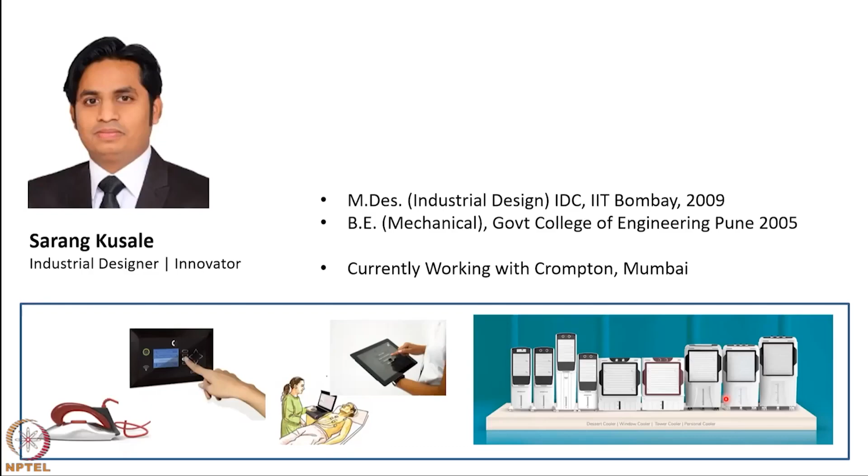So currently I'm working with Crompton, and this is a range of air coolers which I have recently designed and launched in the market last year. So I'm only showing those projects which are actually in market and available in public domain. So apart from this, this is my Instagram page.

So I also pursue a hobby of papercraft and origami, and most of these recent projects are done with Mumbai Airport, where every year they conduct a festival, Jaya He Museum. So these are some of the animals which are created for the Jaya He Museum festival. If you see, these are actually the state animals of our seven sisters, which are the northeast states. So some of the glimpses of this papercraft.

Then regarding innovation, like what is innovation actually? It's very fuzzy. Anyone want to answer? Like quick answer, we can have an interactive session. A creative way to solve a problem. Okay. Anyone want to add to that? Something which is new, not yet present in the market. Absolutely, definitely. Modification, advanced version of something that is already existing. Okay.

So what is that advanced version? What is existing? So, like bulb to tube light, for example. Mm-hmm. Bulb to LED bulb. Bulb was an invention, and the next thing that goes beyond that, it makes it usable and very much accessible. That makes it an innovation.

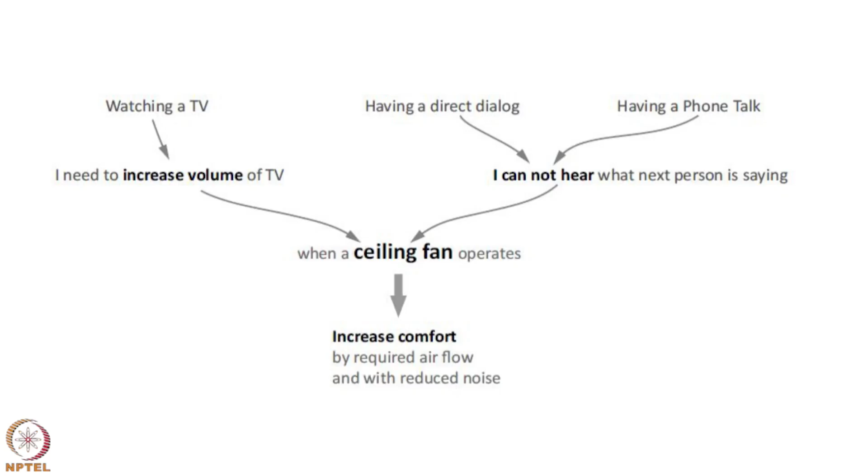So basically, earlier when we were doing fan projects, this is the insight which we picked: whenever we are watching TV, we need to increase the TV volume when we don't hear the other person. Or when I'm having a dialogue with someone, I can't hear what the other person is saying. When I was having a phone talk, why is that happening? When the ceiling fan rotates at very high speed, it also generates some noise. So that is causing the discomfort. So this was the insight which was picked up. It looks very simplified here, but it takes a lot of time to arrive at this. So a lot of actual user research was there.

And then, going ahead with this insight in mind, I was having a ferry ride. And then I encountered the seagull bird. I was photographing it. That really took my attention, because that bird, when you see, doesn't flap its wings often. There is a very interesting thing about the seagull. It's the only bird which you spot inside the ocean, because they use the wind current and they don't flap their wings very often. That's why they can conserve their energy and they can glide for hours and hours over the oceans.

So after I came back to my desk, I searched through technical papers. I actually got hold of some actual wing profiles and then took it ahead. So this is how the project started. This start was not like a normal project, which starts with a marketing brief; this is the kind of hobby project which we do.

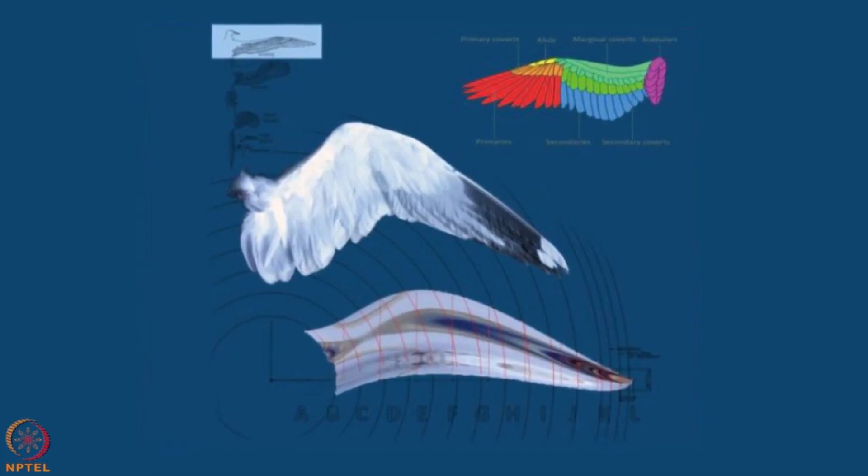Once those projects reach a certain level, the proof of concept level, we showcase them to marketing. So then we discussed the seagull bird and did a technical study of the wing profiles. Then I did a lot of iterations with the digital model, actual paper models, and actual 3D printed models. So a lot of refinement was done. Every revision is an upgraded version of the earlier one.

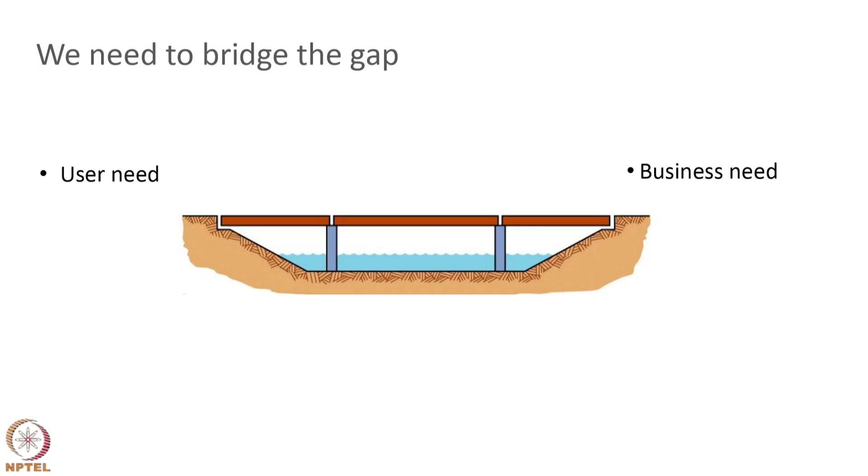And while doing a concept around this seagull bird profile, when we are making a commercial project, we need to bridge this gap. We are the best people who can bridge this gap between the business need and the user need. We are well versed in the user need, what is faced by the user, and the ideas we get, but that has to be commercialized into a successful product. So we have to study the other side also. I think Chakravarthy sir might have covered this in his innovation lecture, the business side of design.

This is the initial concept where it started. At that time, this was the current product portfolio of Crompton. How the product will stand in this portfolio, how the price segment should be for this product. If you see, there were some decorative fans which had lesser performance. But this fan will offer premiumness as well as better technical performance. So this segment was not there earlier. And noise as a comfort parameter was not considered, because people were only worried about having a high speed fan which gives higher delivery.

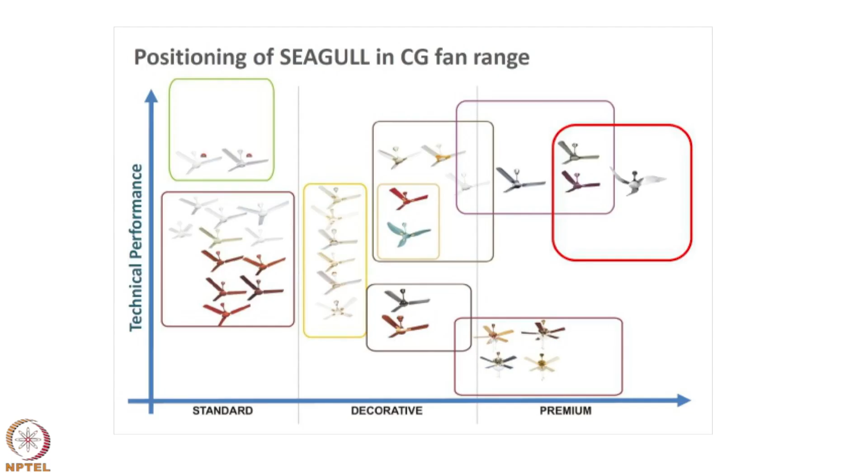So I had to struggle a lot here with the marketing or business team, that okay, having a certain amount of airflow on your skin is required, but that doesn't necessarily mean you should have that high RPM. So that's an interesting way. And there are also paradigms in people's minds, because whenever you want to change something which is not part of the existing scenario, people find it very difficult to digest. So that's why we did the basic concept of this.

These are concept renders, and we did an actual prototype of the fan at 1:1 scale. We have also done this kind of detailing, so the 1:1 scale will give them the exact idea of how the fan will look. And there was also a question: will this fan provide the sufficient air which is needed? So for that we made a 1:1 actual prototype mounted with a motor, rotated it, and that air feeling was delivered to the business people, so they could take better decisions. And that's where the power of prototyping lies.

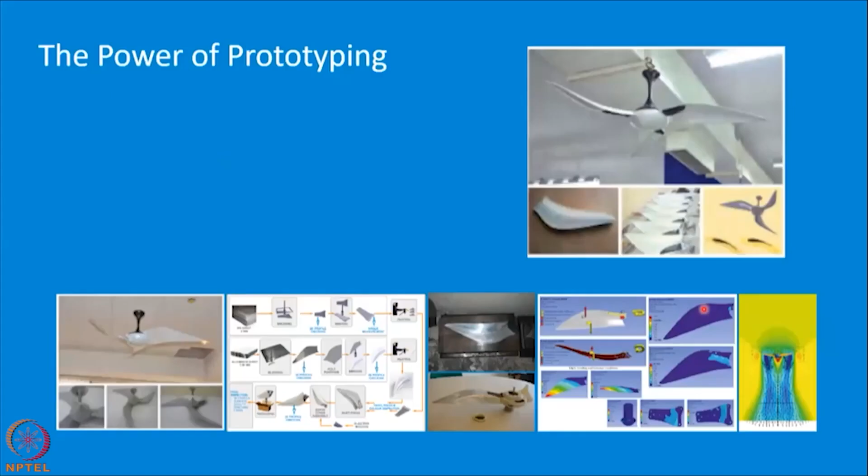Even whenever you're working with Chakku sir, he will always insist on having prototypes, mock-up models, and he will not be satisfied with one mock-up model. Building more prototypes helps, but when you are demonstrating a concept which is out of the box, the prototype is a very powerful tool, which can provide the product experience for the target audience and the business people as well. So we did this actual prototype.

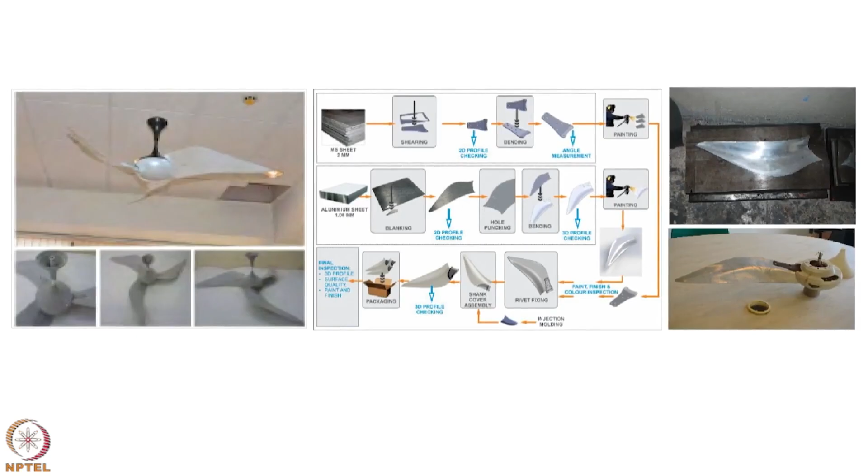We made a raw tool of this blade, and then we actually did simulation also. What you see is the simulations to understand the airflow, whether it will deliver the same amount of air, and this way we were successful in providing the amount of air but at very low speed. The existing fan runs at 400 plus rpm; this fan will run at only 280 rpm. And this gives a very considerable saving in decibels, that is, the noise levels. So this is the blade profile which we developed, and later on we filed a patent on this also.

So this blade has this profile which is continuously varying from hub to tip and from the leading edge to trailing edge. So it's a continuously varying profile. A patent is also granted on this blade profile. So the form, if you consider here, is very functional, and that functionality of this form helped us to get this patent.

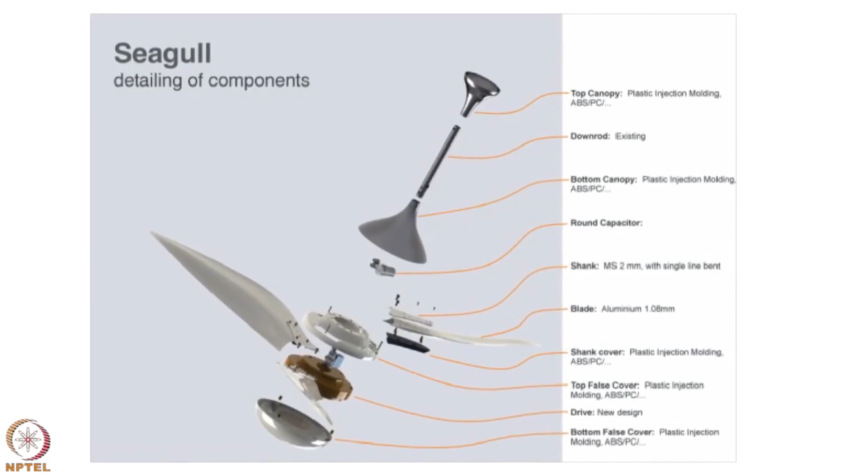Then we further commercialized it with the range of possible trends which are available, and we have mapped this fan in different themes. And this is a concept for the ceiling fan with actual proposed colors. So we took the same color scheme of the seagull, which is gray and white, which is merging in modern interiors. And so finally the experience of the comfort.

So though this fan is giving a high air delivery, it is operating at very low speed. And that's the key for the silent operation of this fan. And later on we also found out that this fan's air has a texture. So when we are designing a product, we are only thinking about the product design, but when the user experiences the product, he does not see only the product, but the actual experience, that is how the air is thrown to the user, what comfort the air texture is providing to the user, that also matters.

So this is a side profile of this fan. So any question on this? I kept it very simple because there are a lot of details which I can't show. We want to see all the details. It's very nicely captured, Sarang. But we will open it to the students.

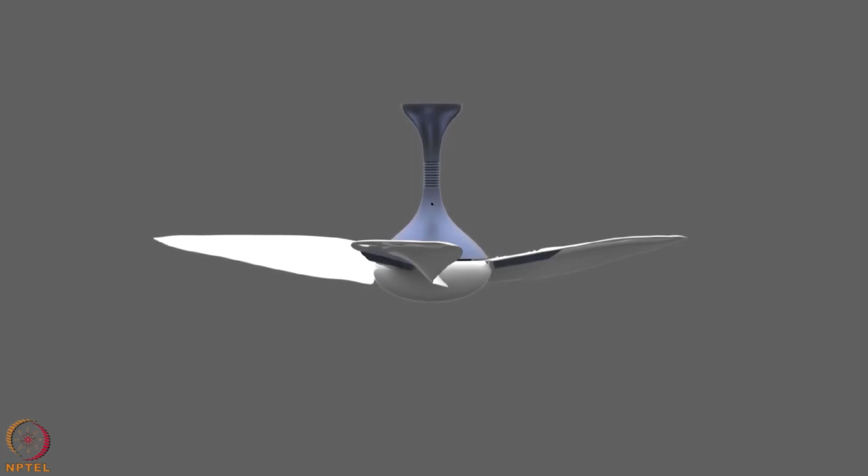But when we design an aircraft, at the tip it still has a certain section there. That's why they need the winglet over there. But if you see triangular wing profiles like Concorde or Blackbird, they don't have these vertical winglets. Yeah, especially fast aerial vehicles. Yeah, that's the form. So it's very functional. Oh, okay. Thank you, sir.

That's my doubt. It's a variable cross section, isn't it? Yeah, it's variable cross section, correct. Doesn't it make it heavy? Yeah, it's heavy. But actually, the weight of the blade and the profile of the blade are two different parameters. What contributes to your airflow is not the weight of the blade, but the profile of the blade. There are also restrictions, like the motor wattage, which you have to maintain at certain levels. So we have done a lot of iterations and optimizations over it.

So this is not metal, right? It's molded. It's a molded plastic, in fact injection molded. Yeah, in fact, I was talking to other competitors of Sarang's product, and they were saying that Sarang was very early in the field, the first one to introduce plastic while they were all still thinking, and now a lot of plastic blades are there. When Sarang made this innovation, he was very early in the market, and it made everybody stand up to the possibilities. It was one of the very early designs.

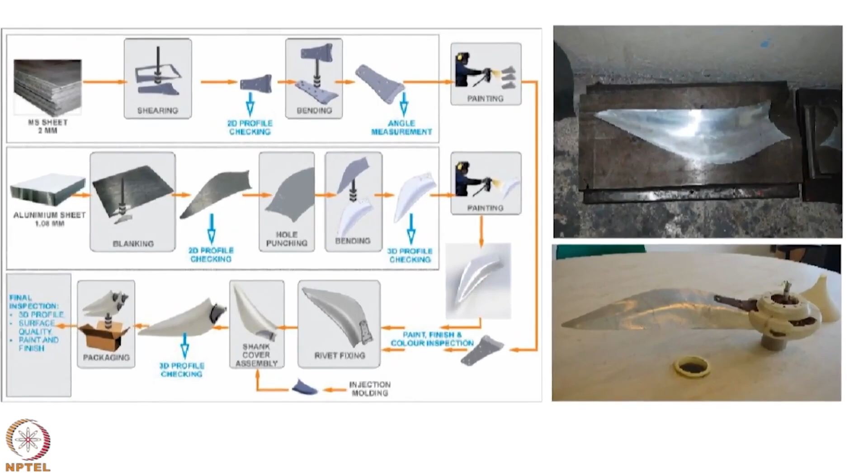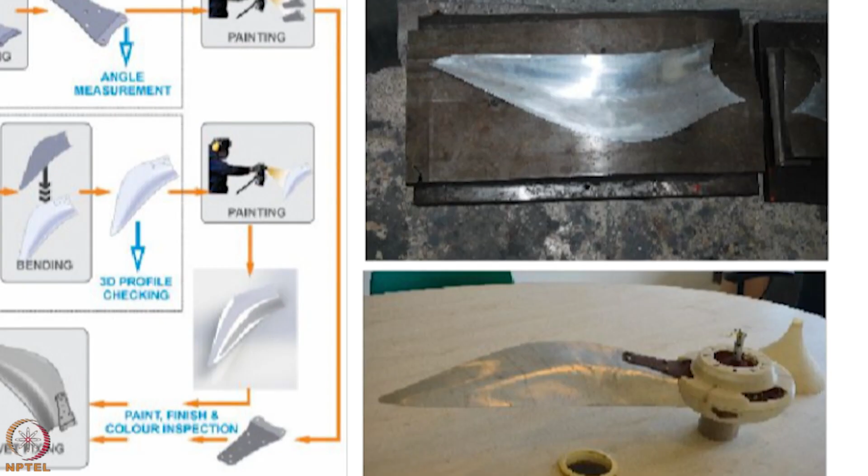So initially, before doing injection molded plastic blades, we made a raw tooling and made an aluminum blade with this cut. This was the actual raw tooling we made, a tool made only for prototyping. Then with this fan we did the testing, which gave us both the result and confidence. We also took help from our simulation experts, where we analyzed the flow of this fan. So this is how we do the air delivery testing.

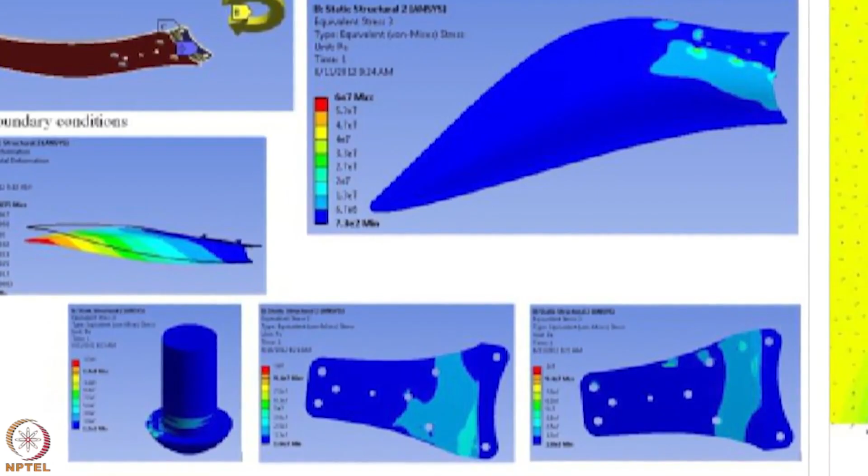A similar setup we have done in the simulation, and a lot of stress test analysis was also done, because the point sir touched upon is very interesting: the normal blade has a shank with a double twist bend in it, but this design doesn't have this bend. It is designed to have only a single bend, so that the blades are at an angle. Because the blade itself has a continuous curvature profile, it doesn't need the other angle. So this is also simplified. And during the structural analysis and airflow simulations, it came out that it is a much stronger and very effective blade.

But I also like the point that when it is molded, because of the curve, it will become the molded blade. It's also designed for molding; that type of feeling is there. The flat blade will be very flexible. A blade like this would be really strong and nice, even if it's molded.

So earlier, during the user research, what we found is that when you buy a ceiling fan and clean it the first time, you change the profile of the blade, because sometimes the blade is not accessible. People try to pull the blade, which destroys all the set angles in the blades. Then they start wobbling or vibrating. I have this ceiling fan mounted in my house. I took it out and washed it clean, and because there is no change in the blade angle, the performance is still good.

Sarang, it's fascinating to see how you were able to translate those inspirations from biomimicry. I have a couple of questions. One is the idea of noise, right? You mentioned that the more the noise, the more the performance. Were you able to capture those decibels? It is interesting to know. Is there any decibel figure you captured for the current fan versus this one? How much of a reduction?

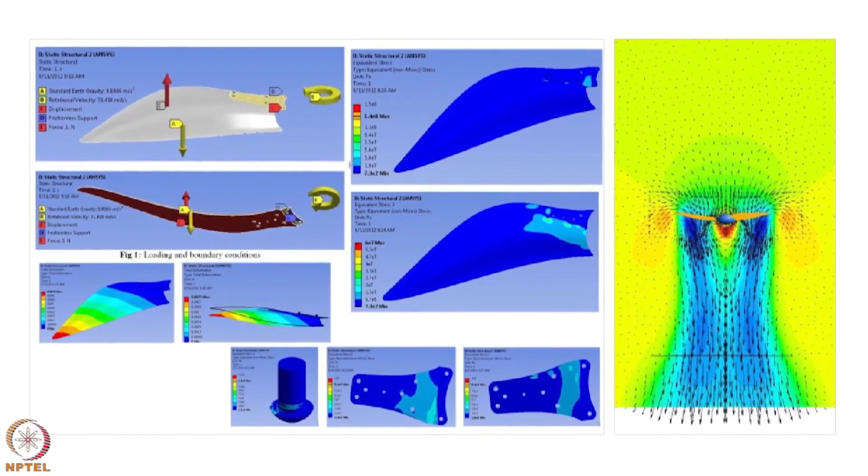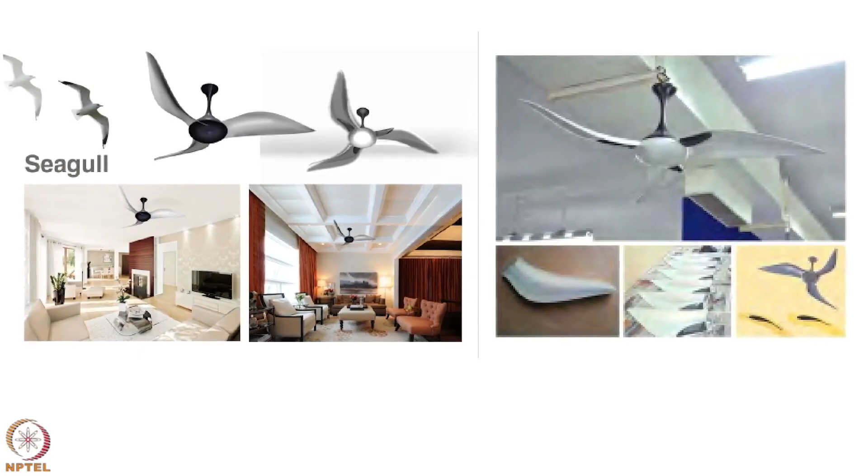So though this looks like a simplified 3D 1:1 prototype, a lot of prototyping was done beforehand to arrive at this stage. What we did, we did hand mockups. We also used wireframes to generate this profile, then scanned those profiles, got them into Rhino, developed the surface, went back into the other software to refine the surface, and came back into Rhino. So a lot of iterations were done because the edge has to be seamless.

When you work with these surfaces, you have to really be assured the flow should be smooth. So a lot of digital iterations are done, prototype iterations are done. So paper prototyping, wireframing, 3D printing, all types of 3D printing, FDM, SLS, and then also actual aluminum tooled-up samples, then actual molded samples of existing parts, which helps us to define the parameters which we should go for.

What is the minimum thickness? What is the maximum thickness? So it needs a lot of iterations.

In fact, you didn't talk about inspiration, Sarang, how you were traveling to Elephanta. This time you didn't mention that story. You have our students. You have to mention all the stories.

So basically, the companies work on efficiency and low-risk activity. So the whole ethos of a company runs on that level. So what happens when you come with something which is disruptive like this? This is like a disruptive fan. Nothing has happened to fans for ages other than a little bit of technology, now from AC to DC, BLDC, which is a great disruption on a technology level.

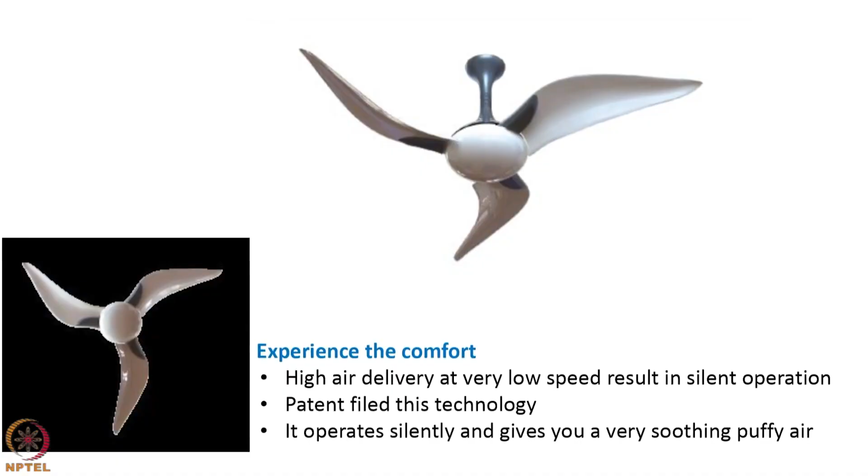But formal disruption, I call this a formal disruption in the fan segment, which never happened, like the way it happened for my Z-line petrol pump. So that type of disruption, it's very, very difficult within an organized company to bring. So I'm very, very proud of what Sarang has done. And that's why we want to really see the journey. And that is fabulous. Any other questions, students?

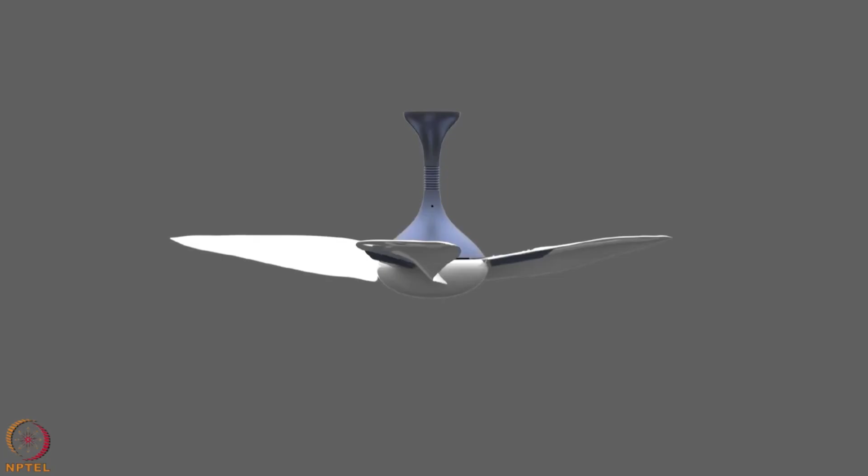Sir, I had a question. Recently, I had seen one video of how an owl makes the least noise when it flies. So it is because of its larger wingspan. So can you explain? Here it appears to be a little thicker in the middle part. So how can that point be applied here? How does that work? Because there is air contact for a longer period of time, is it because of that we are getting less noise, or how is that working?

Okay, so first what you touched upon is the owl's wings, right? So owl's wings, they are not very smooth. They have feathers which occupy all their wings, and they trap air inside it. So whenever they move, the airflow is not disturbed. Similarly, when an eagle flies, it disturbs a lot of air. When an eagle flies, it's more like a jet bomber kind of aeroplane. So it needs more thrust.

But when an owl flies, it doesn't make any noise because the air flows smoothly when the layers are separated. When it goes over the top and bottom, and they merge back at the trailing edge, there is very little turbulent flow for the owl, and that's why it makes very less noise. What is noise basically? If you go back to the basics, it's a vibration. And why are vibrations caused? Like when you whistle, right? What does a whistle do? It creates air layers which vibrate with each other.